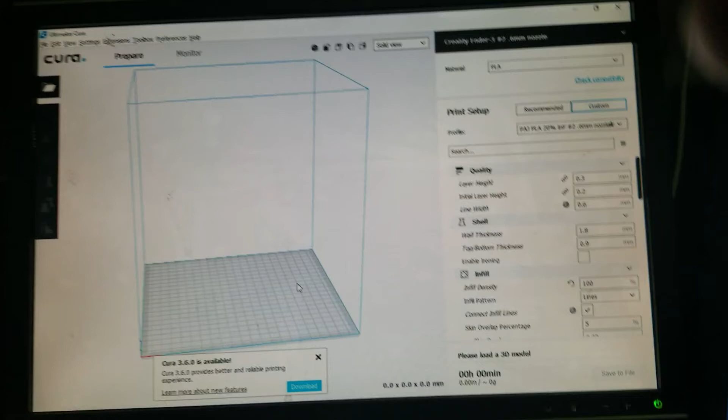All right, I was trying to go live in my Facebook group, but for some reason it wasn't letting me.

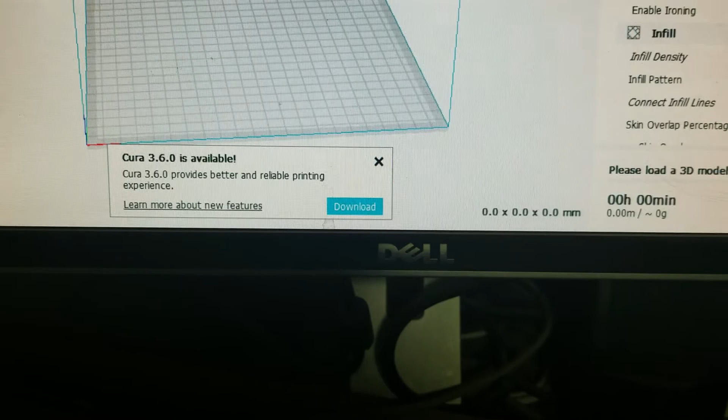Quick walkthrough of how I slice in Cura with the Ender 3. I'm using Cura 3.5.1. I find it to be way more stable with the Ender 3. People were having issues with the extruder. The software 3.6 was making the extruder go at funky speeds, messing up their prints. They switched to 3.5.1 and all was better.

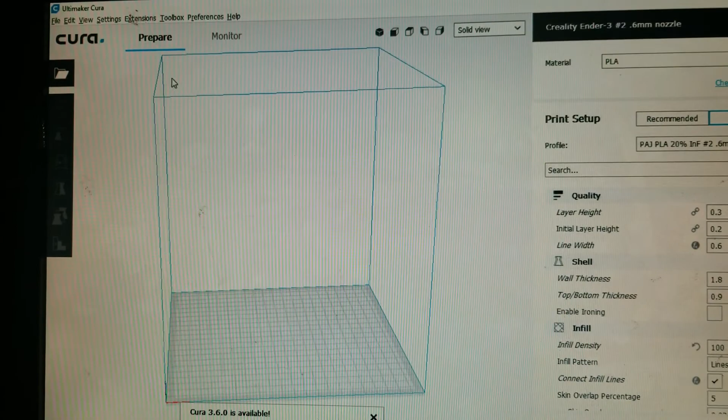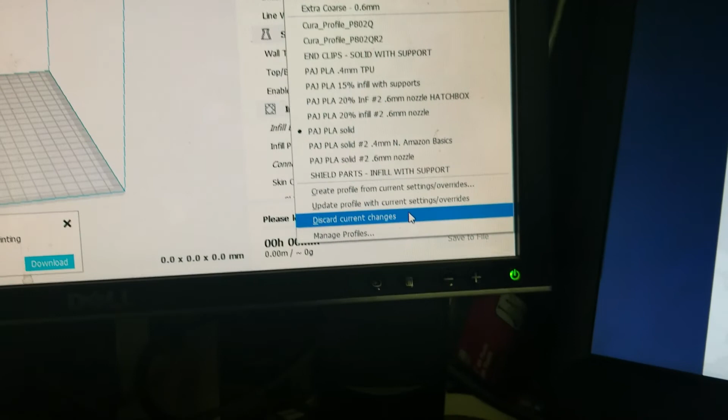Alright, so here we are in the Cura program after it starts up. You're going to be setting up your printers. Add a printer. There should be a Creality Ender 3. And then the profiles are actually for just the setups. So you can switch here. You should be able to go to Manage Profiles, and then you should be able to import one of my profiles. Okay, and that sets up all these settings.

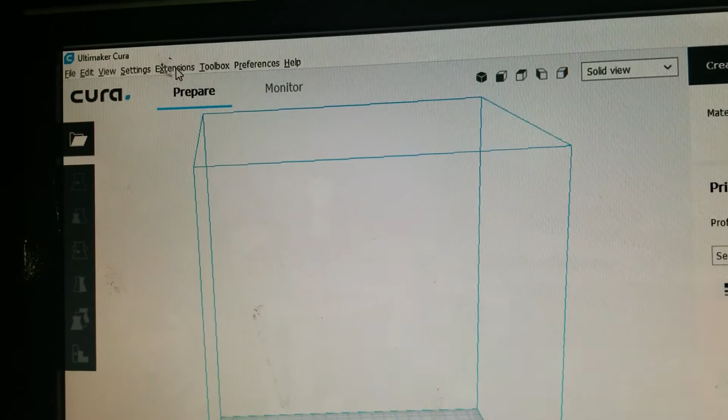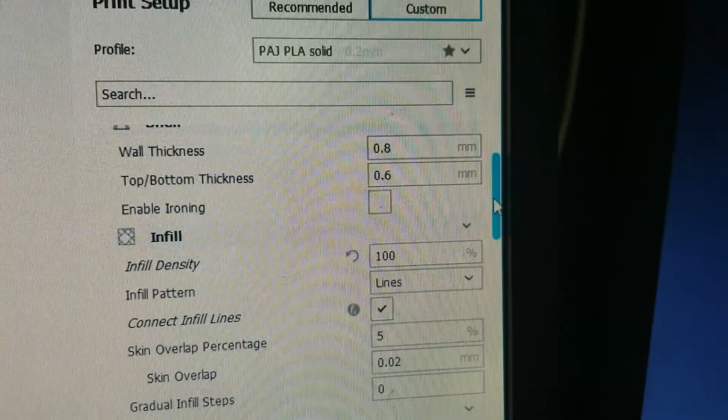If we go through them real quick, let's see, do I have the right? I have two Ender 3s, one with a different nozzle. So let's see if we have the right printer setting selected. Yeah, okay. So with a standard 0.4 millimeter nozzle, I have a layer height of 0.2, line width 0.4, wall thickness is 0.8, which means it's going to go around 2 wall thicknesses. But I also have another extra line that is being added for overlapping for the infill, and that works really well. So it actually ends up doing 3 wall thicknesses.

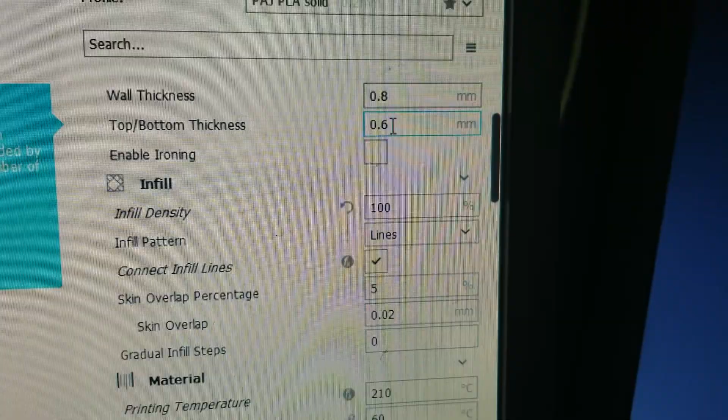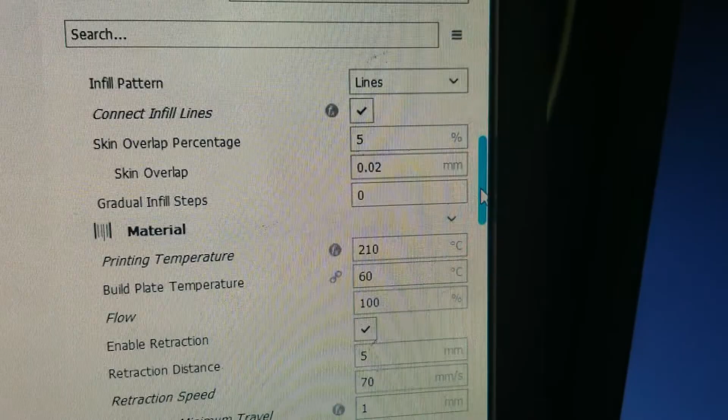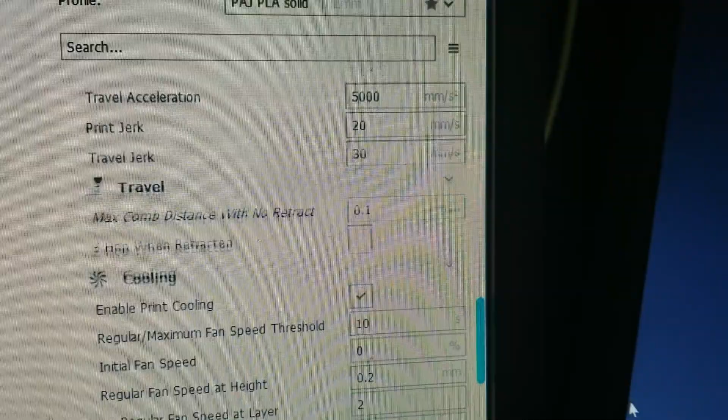Right here, top and bottom thickness is 0.6. That means there's going to be 3 top layers and 3 bottom layers. Right now this is 100% infill density. If you don't want to print solid, set that to like 15 or 20. Let's see. Printing temperatures for a lot of PLA for Hatchbox, I use 210 and 60 degrees. There's my retraction settings. They work very well. Some of the other settings, I'm not going to go through them all, but they work very well.

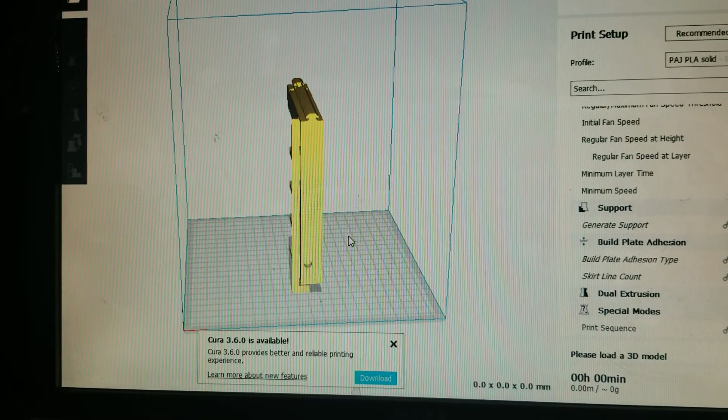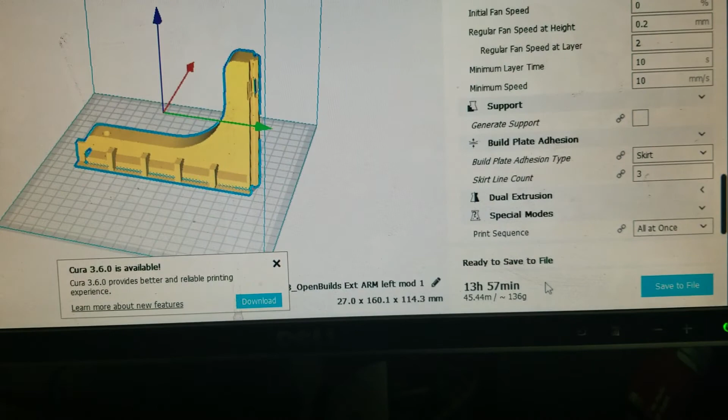Alright, so to slice, all you do, once you have your profiles set up, is you open a file. Okay. It imports it. You're going to have to rotate it if it's not sitting correctly. Here's one of my arms for a dust boot. I'll rotate it around. It should set down, and it's slicing as we do it, and right there it's all ready to save. If you have an SD card in the thing, it'll say save to removable disk, and so you just hit this and it saves it, and then you go and you load it on your computer.

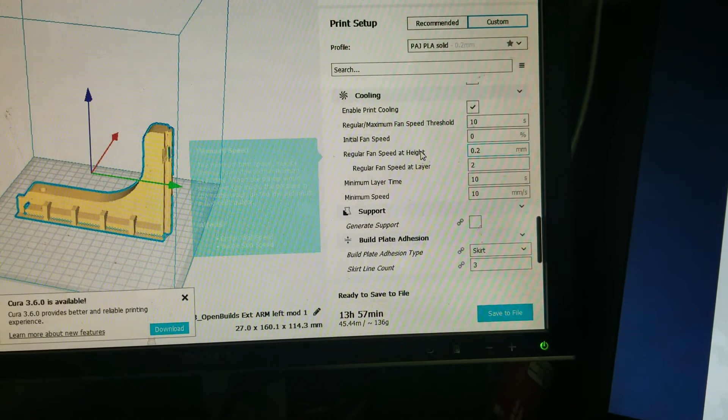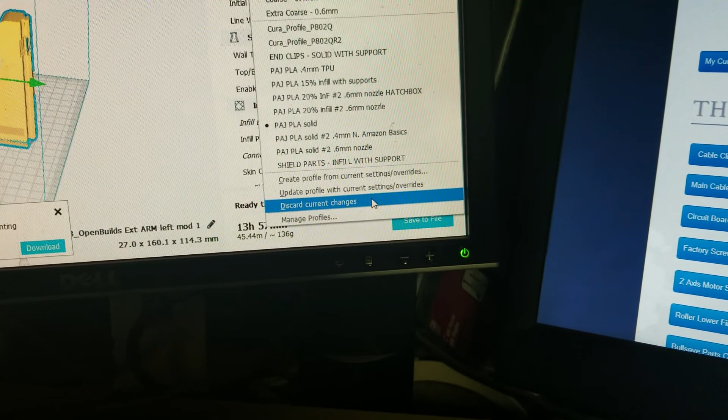It's really that fast. Once you have your profile set up, you can save all sorts of different ones. You can save ones with different infill densities. It's pretty easy. Once you're up at the top, let's see, where is that? Right here. You can go down here and you can update profile with current overrides, or you can create a profile from the settings you just did, or you can discard changes. A couple quick ways to make quick profiles.

But anyways, that's it in a nutshell. It's pretty straightforward. Once you get it set up, you should be able to just select your profile, bring in the model, orientate it the way you want it, and hit save. That's it.

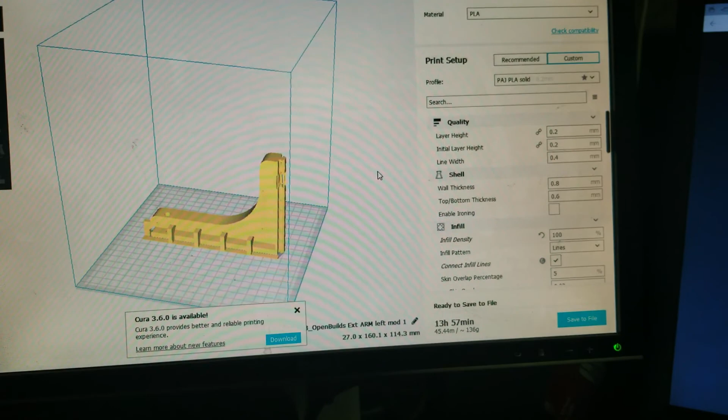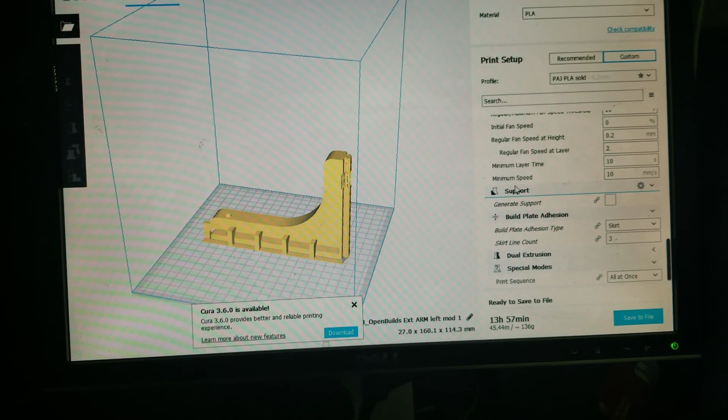Supports. If you have the bullseye fan duct, you're going to be able to have supports. You don't need supports until like around 70 degrees. There's some settings down here. This one does not have supports active right now, but that's a whole nother beast getting in there. Supports, but not too bad once you have those set up either.